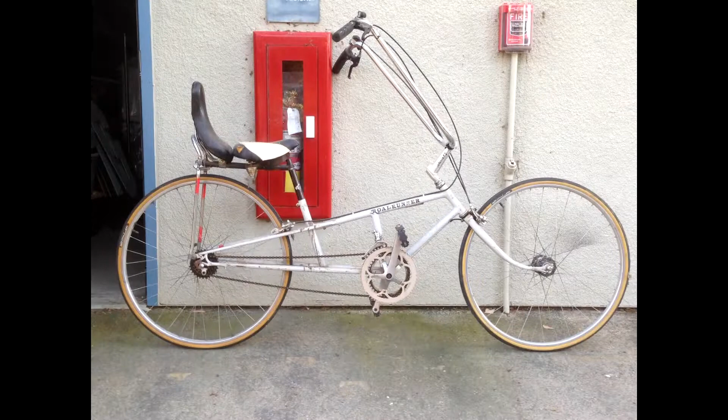So, to describe a bit about our project, let's first take a look at the need our project is hoping to solve. For mountain bike riders, any bike that is designed with a slack head tube angle creates a force phenomenon commonly referred to as fork flop that occurs whenever a rider is ascending a steep hill or is pedaling at low speeds. An extreme example of this can be seen in the photo shown here with an old bike that used to be on campus.

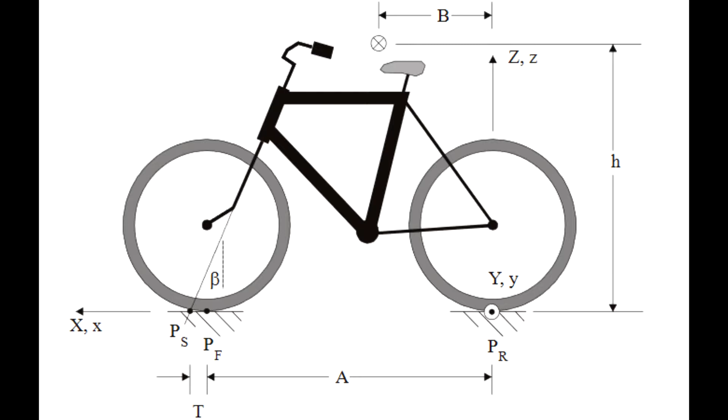So the need for our project is to somehow create a device using internal springs that can improve the response of the bike that has a slack head tube angle. For our design process, we went through many ideation sessions to allow for a multitude of solutions to be brainstormed before locking onto just one idea. Our team landed on an original design that would interact with the bike head tube and house two torsion springs to provide the counteracting forces on the bike.

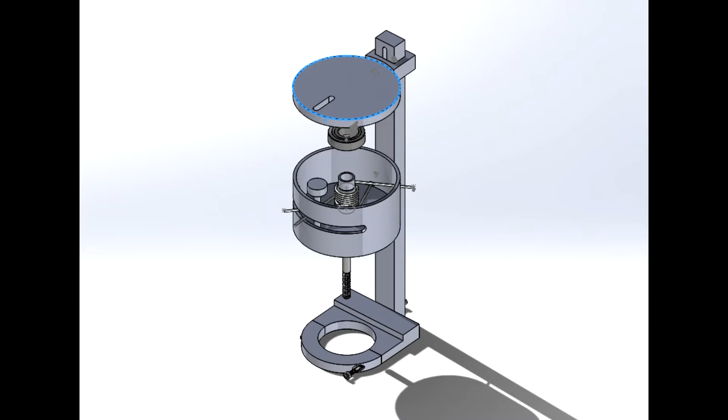After presenting this design at our preliminary design review, we got crucial feedback from both our peers and our sponsor to tweak parts of our design to make it more secure and to simplify the way that it attaches to the bike. Following this, we simplified the design and created a spacer design that would sit in the place of a typical bike spacer and house our torsion springs, which then interact with a separate piece that is connected to the bike frame.

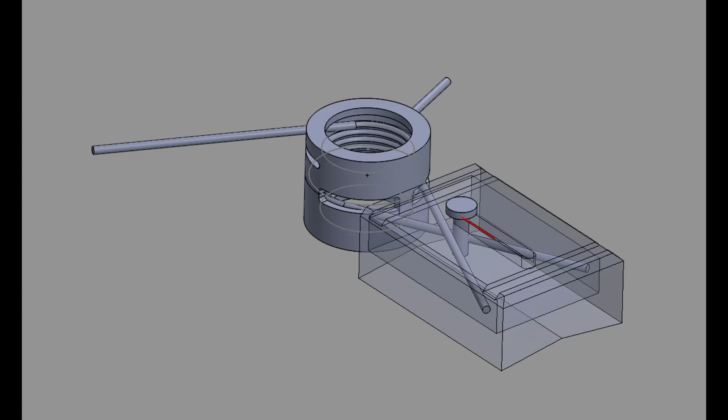While landing on this newer design, we were still constantly tweaking and editing small components on the spacer and the housing, as we found new issues that might hinder the way this design performs, such as a rider hitting the housing with their leg, or the spacer design not allowing for full rotation of the springs. These edits in our design led us to the design you can see pictured here, with two separate spacers, two clamps around the head tube, and a housing for the springs to interact with the pin.

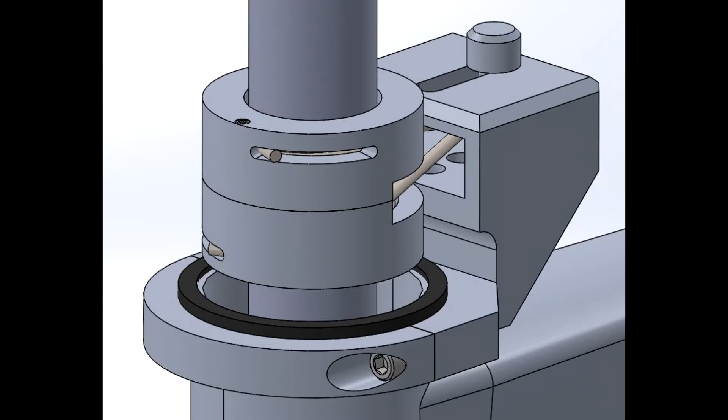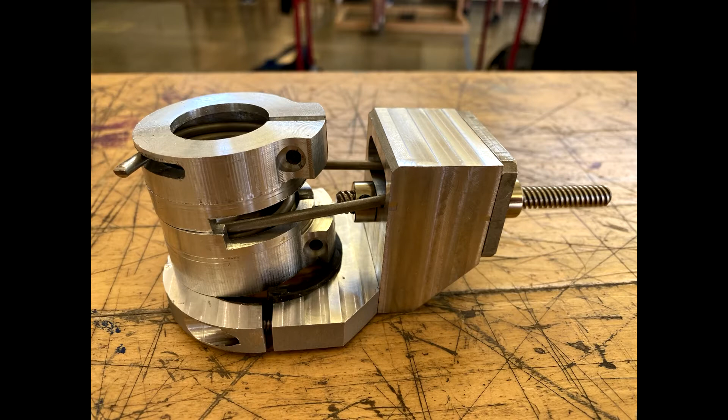Taking this design into our critical design review, we again received valuable feedback that made us rethink some of our design. So for our final design, Jonah will give a quick overview of all the components. This is our final design. It uses two torsion springs that counteract unwanted steering moments about the steering axis. These springs are fixed to the bike using custom spacers. Our design also makes use of a clamp attached to a housing, which interacts with the spring legs in order to provide the necessary spring forces. The following videos and animations show how this works.

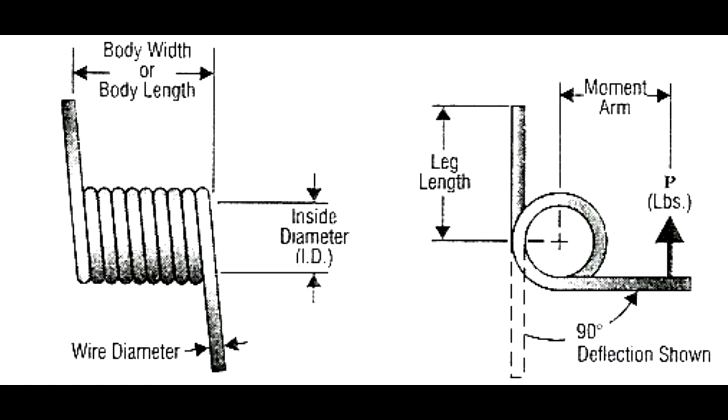We sized our torsion springs based on the forces we expect fork flop to create on the bike we used for testing. We took given spring constant values from suppliers' websites and then used various statics equations to determine what force and moment arm would create the correct restorative force on the bike. On top of ensuring the spring forces were correct, we also conducted FEA studies on the spacer design to determine the forces the spacers would experience while in compression on the bike. This allowed us to see that our components would not fail under the stresses the bike places on the spacer system.

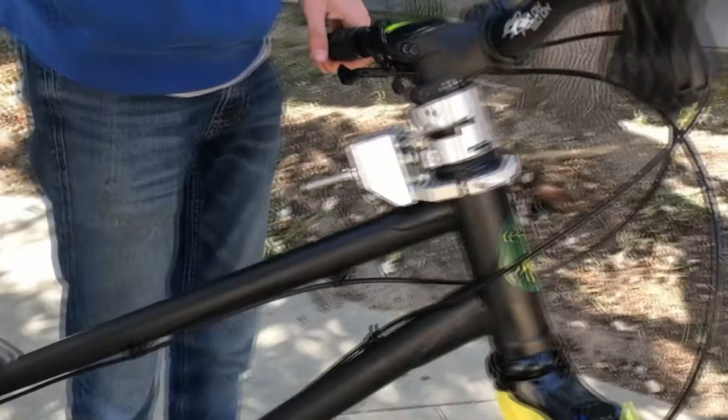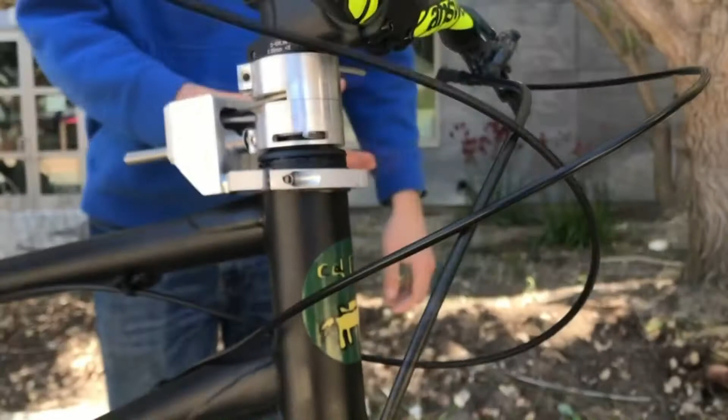Once we had manufactured our prototype, we began our testing process with a quick test to ensure that we could begin our true design verification. This test was to make sure the fitment of the prototype was correct, and that all components could fit on the bike to allow for later testing. Once we had our device on the bike, we gave the handlebars a quick turn to ensure that our springs were indeed counteracting the flop of the fork. And now, Drew will describe how we began our design verification testing.

Our project had 9 engineering specifications that guided our design. The primary specification we were tasked with satisfying was decreasing the fork flop moment when the device was installed. We also had to maintain 80% of the optimal function while under elevated heat and normal riding conditions such as in rain and mud. Our design must also be able to be installed in under 20 minutes, adjusted in less than 60 seconds, weigh less than 20 pounds, have a volume of less than 53 cubic inches, and score at least a 75% satisfaction rating in user feedback and aesthetics.

Fork flop is a difficult phenomenon to measure, and therefore moments about the steering axis were measured instead. Since fork flop is essentially a moment about the steering axis, we felt this was a good compromise and would still provide a lot of insight into how the device was performing. Multiple tests were conducted with the device at its maximum setting, meaning the springs were providing the most possible resistance.

To measure the moments about the steering axis, a simple fixture was designed to fit load cells in and allow the rider to still provide steering inputs into the bike. This test was essentially a proof by comparison, in which target data from the safety bike was compared with the test bike. Maximums and averages were calculated as well in order to get a more global perspective of the results.

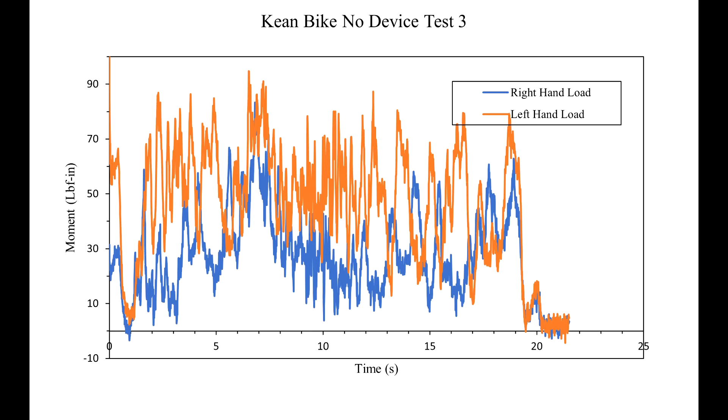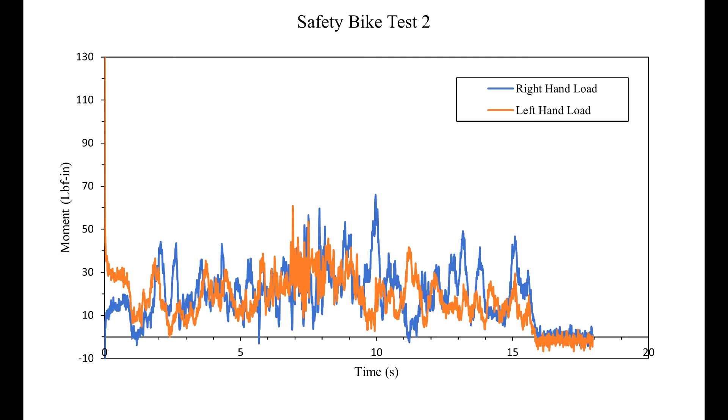As a result of testing the moment applied by the rider in response to the fork flop, we found a peak moment of close to 100 pound-force inches. After installing the device on the bike, we saw nearly a 40% reduction in steering moment applied by the rider, providing evidence for successful improvement in fork flop and rider stability. And in conclusion, our design performed closely to what we expected and taught us numerous lessons concerning the importance of manufacturability of parts and the ability to adapt to new issues that arise.